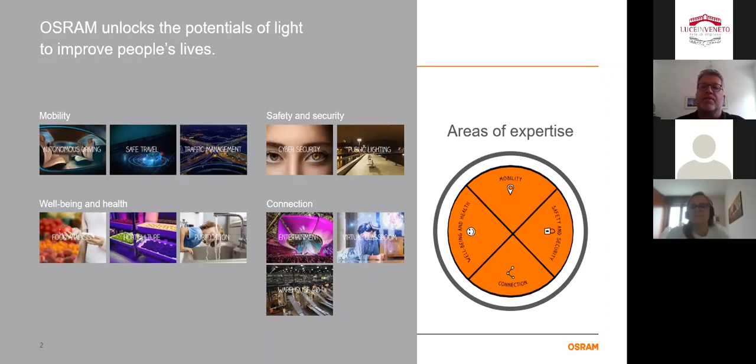This is a change in the setup of OSRAM compared to 10 years ago. OSRAM empowers autonomous driving, equips smart cities, and enlightens digital communications. So OSRAM in general enables people all over the world to see, to communicate, to travel, and to live better. That is our target. In total, OSRAM has more than 25,000 employees, is present in more than 120 countries, and last year had 4.1 billion euro revenue.

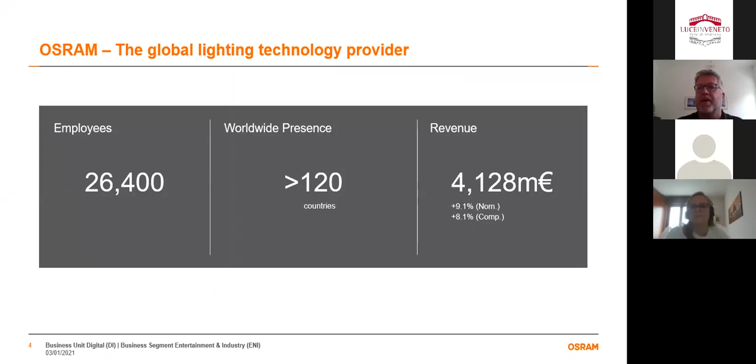The main business parts are automotive, OSRAM semiconductor with LED solutions and single LEDs, and what we call OSRAM Digital, which we are part of. This is mainly the business for complete solutions: horticulture, energy saving, environmental optimization, and asset tracking. We have smart street lighting, and what we call emotional lighting for buildings and so on.

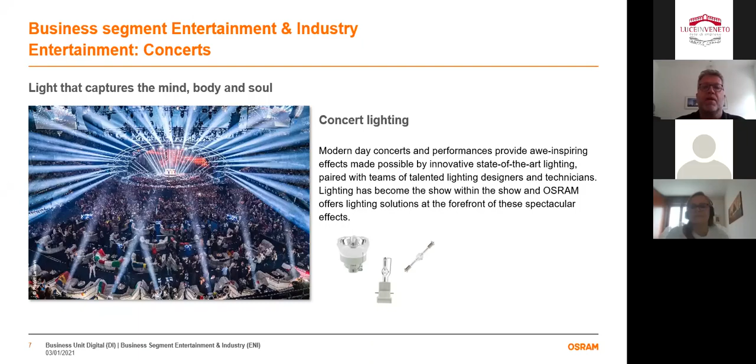On the connectable SSL component business, we have companies like Clay Paky, located in Italy, and ADB, especially for high-end entertainment applications. Then we have what we call ENI, entertainment and industry, traditional lamp components on a highly professional level, with certain discharge lamps, video projection lamps, cinema lamps, and so on. One part is the entertainment part with light sources and fixtures for concerts, what we call concert lighting, including complete LED solutions and complete fixtures with Clay Paky.

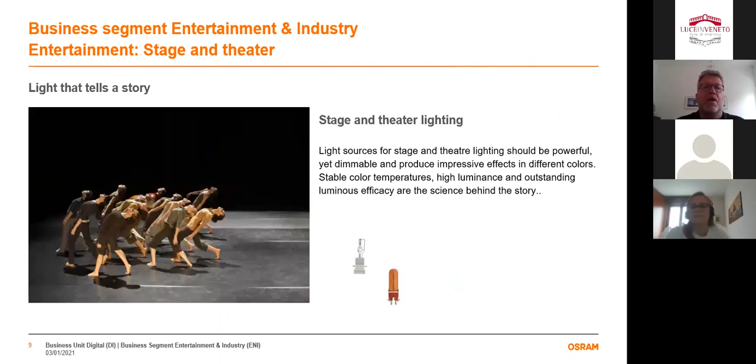We are also focused on studio TV and film applications. Whether shooting a film in a studio or in a TV studio, you still need light, whether traditional or complete LED solutions. We can provide this for stage and theater, all the way to cinema projection. Most cinemas still use traditional XBO lamps, even in digital projectors. The main light source is still an XBO, a discharge lamp, also produced by OSRAM within the entertainment industry group.

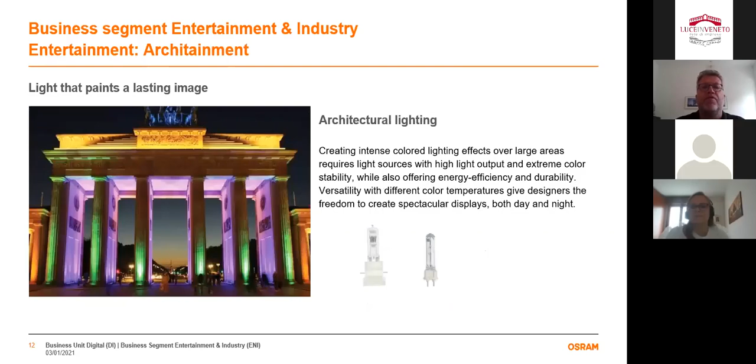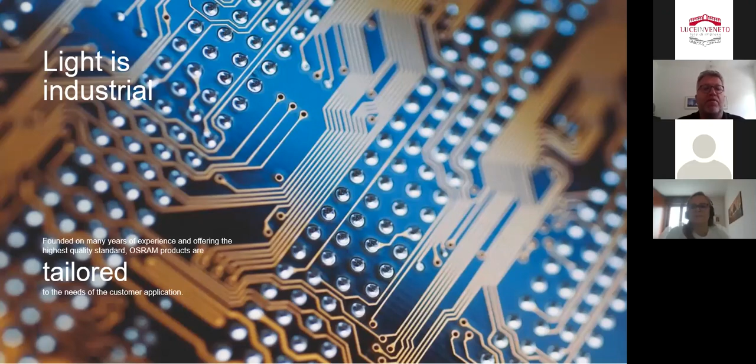For show and event lighting and architectural lighting, we have solutions, with Clay Paky, Traxon and e:cue as part of the companies with complete solutions or fixtures. Coming from entertainment to industrial, for many years we have offered the highest quality solutions tailored to the needs of certain customer applications. As an example, we have Fluence as part of our company, doing light for plant growing: more yield with less use of water, fertilizer and cultivation area.

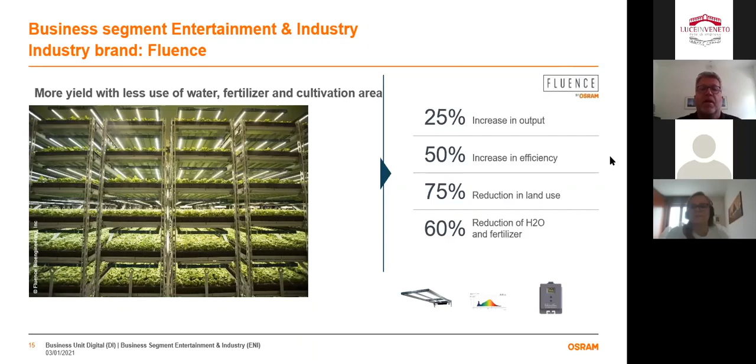This is, I think, the goal here. And therefore, with the light solutions from Fluence, we can increase: 25% increase in output, 50% increase in efficiency, 75% reduction in land use, and 60% reduction of water and fertilizer. This is also the result of our activities here in the industry range.

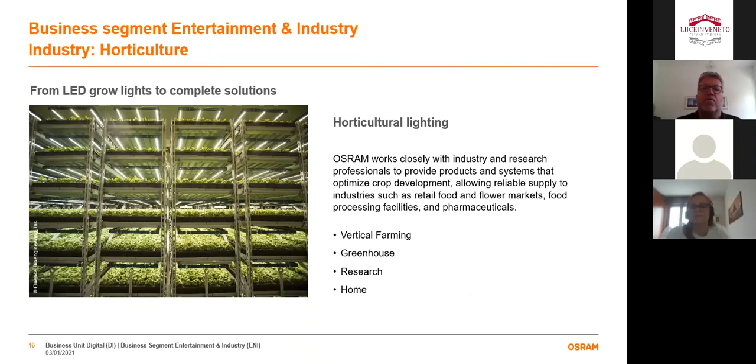As I said, based on LED solutions, we provide light solutions for horticultural, for vertical farming, greenhouse, research, and home. And of course, and this is the focus for today, is UVC purification. We are dealing with that more than 15 years with a complete portfolio within OSRAM. Main application was always purification of water, air, surfaces. That means for home, business, industrial application, water purification, air, surface.

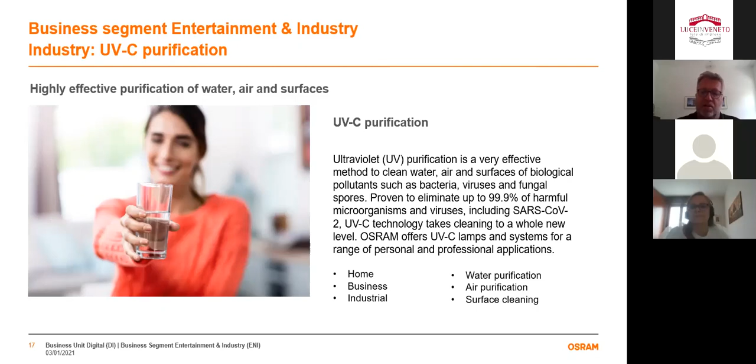And of course, especially due to the pandemic situation last year, the air and surface purification application field has grown or exploded. Therefore, a lot of new customers came into this game, new applications, new products. So that was a huge increase in workload last year, but also in revenue at the end.

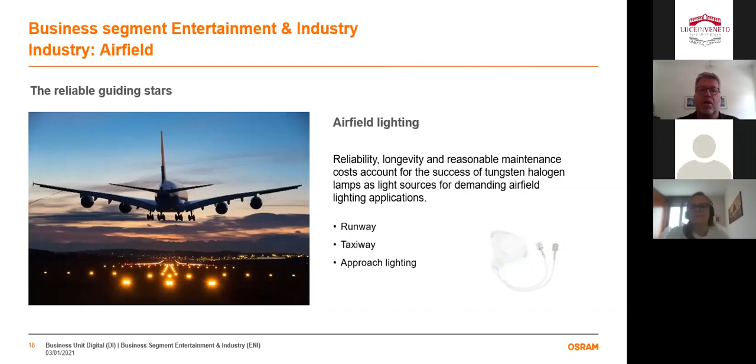And also we provide complete light sources for airfield lighting, for runway, for taxiway, for approach lighting. Everything based on halogen technology installed on airports is also coming from OSRAM. Then we have also special industrial applications with high intensity and maximum precision for the semiconductor industry. Here is an example for the production of microwafers. And here a mercury short arc lamp is used to project the very tiny structures of the ICs onto the wafer.

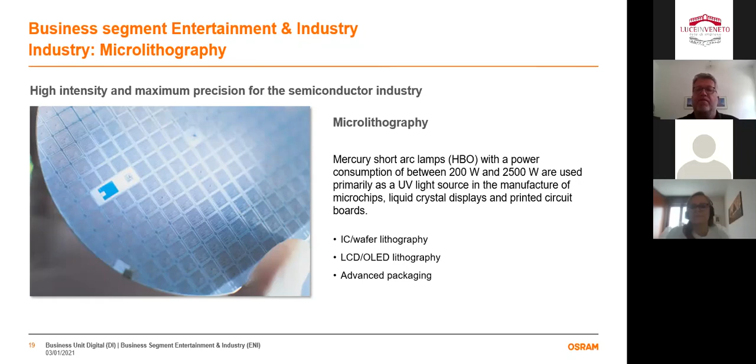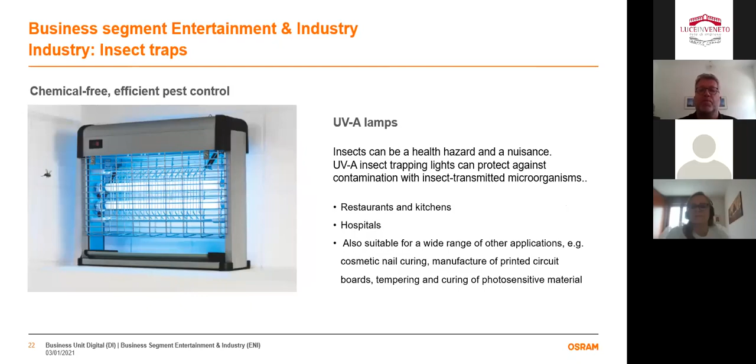And then we have also light sources for medical and scientific devices based on traditional light sources for surgical lighting, microscopy, medical, dental, and so on. Also projection, of course there's less demand because this is going into big screen TVs, but still there's projection out there with our P-VIP lamps for classroom, business, and home application. And we have also with our UVA lamp range a portfolio especially for insect traps in restaurants, hospitals, wherever it is required. So this was a short overview about the company and what we are doing.

So as I said, we are part of the entertainment industry within digital of OSRAM. And the focus in the last year, especially in my workload as a product manager for UV, was really UVC with all the requirements and questions which came up. So that's why I prepared a presentation for you today. I want to give you an update about the situation in the market, what kind of fixtures are in the market, what is required, what is the benefit between LED and the UVC lamp from OSRAM. And hopefully I can answer some potential questions, because at the end you can anyway ask something. I want to give you an update about the UVC market, technologies, products and application fields, UVC safety, products and solutions from OSRAM, and of course the AirZing Pro 5030, 5040, some applications or devices we provided already in the last year.

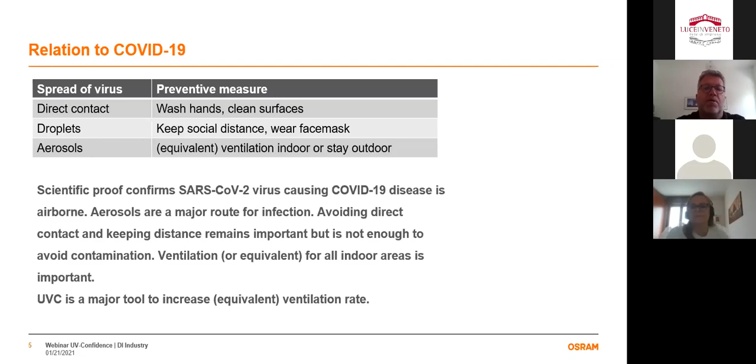That's why UVC, as a technology with this wavelength, is a major tool to increase, let's say, improve the ventilation rate.

But the problem with increased ventilation - and by ventilation we mean bringing fresh air inside, making an exchange between old and fresh air - is that it could be impractical and very costly.

Air quality itself is typically managed by increasing ventilation rates. We express this - and this is an established term in the last year and this year - as air changes per hour, shortly ACH. So how much air you should change per hour in a room to be safe. Each air change in total reduces the virus concentration in the air, and this was measured - a summary of all the measurements shows a reduction by 63%.

Ventilation rate requirements are already part of building guidelines. Increasing ACH reduces the transmission risk of airborne viral particles. I think this is also a result of all the experiences in the last year, from all the recalculations and tests that were made.

However, the infrastructural and operational costs associated with system upgrades are high when possible, and will cause discomfort, noise, draughts, etc. Recent studies showed that increasing fresh air supply to meet recommended indoor guidelines would more than double the energy costs when operated with conventional HVAC systems - heating, ventilation, air conditioning systems.

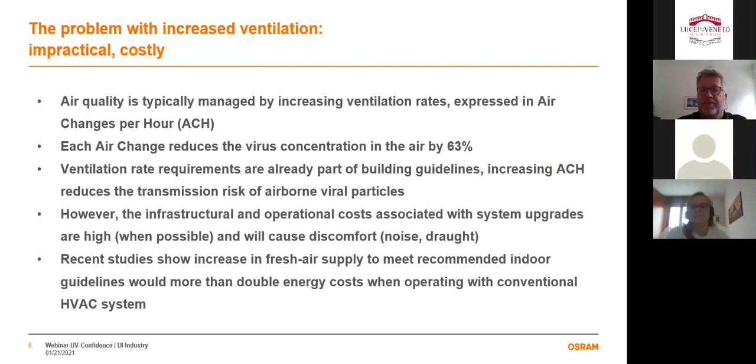That's why if you include UVC technology in the whole story of ventilation, you will save not only cost, you will also increase the purification rate and reduce the time necessary to get clean air in the room.

The opportunity from UVC is always increasing equivalent ventilation. It is well documented that UVC disinfection reduces exposure risks by inactivating virus and other pathogens. So we normally translate this into the UV dose, which is equivalent to air changes per hour, with no discomfort and low infrastructural costs.

For virus disinfection, an ACH of more than 10 is recommended by the WHO. Conventional ventilation systems cannot achieve this. UVC can.

This means the ability to increase occupancy and residence time, and reduce shared space downtime between users. We work towards simple requirements which incorporate space volume, existing ventilation, and localized UVC solutions.

This allows increased energy saving with compliance. Certain studies show UVC could reduce buildings' HVAC energy demand by up to 50% and allow for localized solutions.

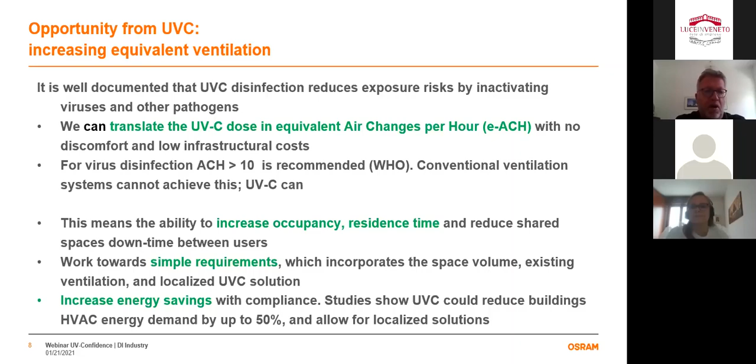This is something which was partly known before, but the problem with air purification in the years before Corona was always how to measure it, how to prove it, how to convince people about it. The good thing about this whole pandemic is that more and more tests were made, and we arrived at this kind of regulation, these standards for the ventilation of rooms.

As I said, UVC light can help a lot. Why can UVC light help, and what in general is UVC light? Most of you probably know that already.

Maybe for some it's only a repeat here, but still: it's a non-visible light and has higher energy than visible light. It's situated on the electromagnetic spectrum between visible light and X-rays. We classify it into three wavelength ranges, each having different applications.

315 to 400 nanometer, we normally talk about UVA, and this is what I mentioned, especially used for insect traps, for detection of forgeries, drying inks and paints, it's still used here. Also the transition to UVA LEDs is much higher than UVC. I'll come to this later, but they are still also conventional in the market.

But this is general, the wavelengths we're talking about. Then we have wavelengths between 280 and 315, mainly for sun tanning and medical therapy. And then we have 100 to 280 nanometer, which in total is the wavelength range for UVC. This is mainly for disinfection. Let's say the really germicidal range is between 250 and 280 nanometer.

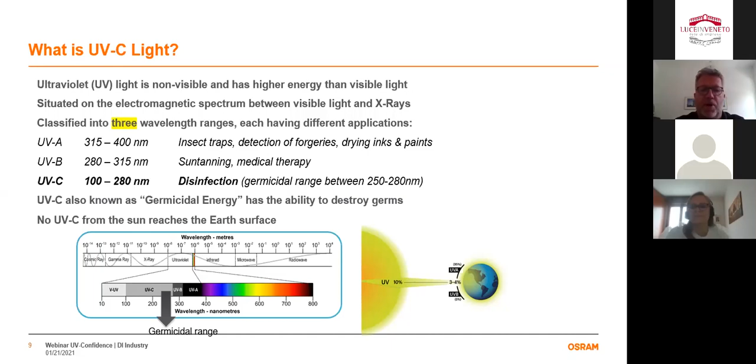That's why it's so effective regarding bacteria and viruses - this radiation does not exist in our atmosphere, compared to some percentages of UVA and UVB. Viruses and bacteria normally are not used to getting UVC light, and this is, let's say, the advantage we have here with UVC.

How it works: in general, the DNA and the RNA contain the genetic information specific to the species, information that is transmitted during the reproduction of these cells. The photochemical reaction created by the absorption of UVC leads to the creation of distortions in the DNA and RNA, making the replication of the microorganisms ineffective or impossible. This results in cell death or the appearance of mutants that are non-viable or unable to reproduce and can't cause disease or spoilage. So this is the advantage we have with this whole UVC technology and the special wavelengths.

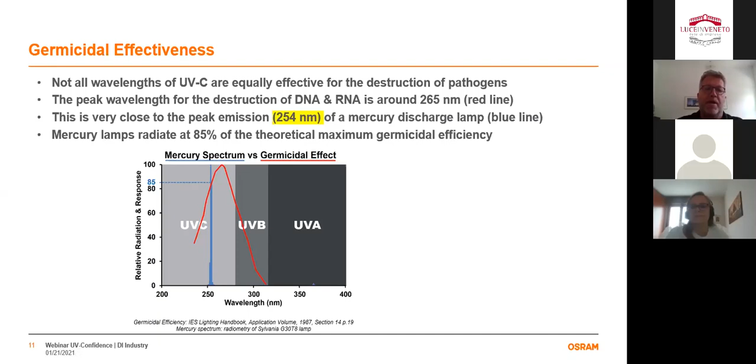UVC allows consistent performance. How you need to destroy a certain pathogen in the air, on the surface, in a certain time - we call it the dose, that is the energy which is required to make that happen. The dose is quantifiable, allowing for reliable and consistent disinfection.

There are two important factors which determine what's required for the inactivation. One is the intensity of the radiation - how much energy on a certain surface I have, what is the power of the lamp, the UVC power, etc. And what is the duration of the exposure - how long am I able to expose this certain surface?

And we have, let's say, this well-known formula - maybe not always well-known, but well-known in the meantime. We can calculate this for air, for water, and for surface disinfection. The dose accumulates; it does not need to be continuous. Air treatment should always consider recirculation.

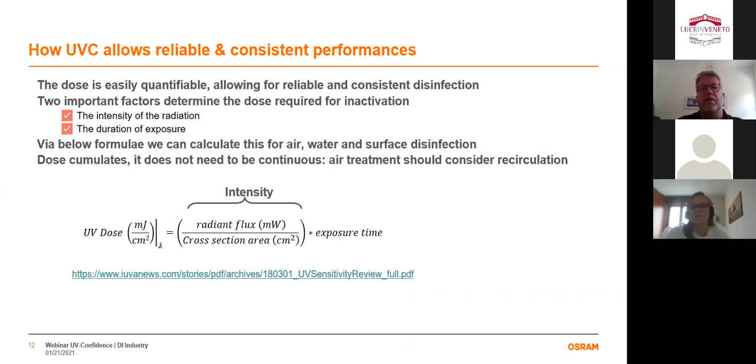This will help here, and OSRAM also has on the website calculation tools for certain wattages, whether it's AirZing 5030, 5040, or certain UVC lamp types. Here you can calculate what is my distance, what is the dose required to destroy a certain bacteria or virus, and then you can easily calculate the exposure time required.

We know there are certain UVC energy sources in the market. Let's start with mercury lamps, where the focus is here, and also in our portfolio - low power mercury lamps in different shapes, single or double-ended, from 4 watt to 95 watt.

The pro of these light sources, and why we were so successful last year, and why we expect growth in this mercury lamp market for UVC in the next years, is because we have the highest energy efficiency and the highest UVC power necessary for certain applications. The lamps are long life and reliable - we're talking 8,000, 9,000, 10,000 hours lifetime. It's proven technology, with supply already existing for ECGs, CCGs to operate the lamps, and it's quite easy to apply in systems.

And of course the con is there's a tiny mercury dose inside - we're talking about 2 milligrams, 4 milligrams, but still it's mercury inside. It's not banned due to the special application regulation within the EU. These lamps will exist for the next years, but still it's mercury inside.

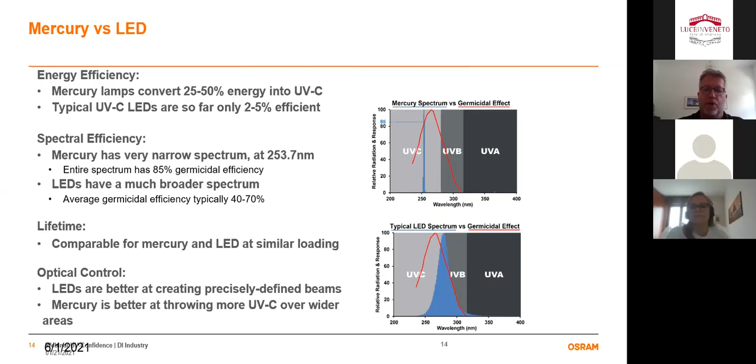And of course, I don't have to repeat this. It's really proved, and also researchers from, for instance, the Boston universities found out that UV light has the ability to eliminate the coronavirus. I think this is the basis for all the further slides and further discussion. This is also clear. And UVC light also eliminates at least 2 other coronaviruses that are near relatives of the COVID-19 virus, SARS-CoV-1 and the MERS-CoV virus as well. So this was basic information about the technology, pros and cons.

Now let's go into the fixtures. What are the different types of fixtures in the market? Of course, you know it already, but it's always good to see what the benefit is, or what kind of application can be used. First of all, we're talking about contained UVC light systems, completely closed light systems. That means the disinfection itself occurs within a closed, contained space, using a hidden lamp fixture. I mean, this is clear.

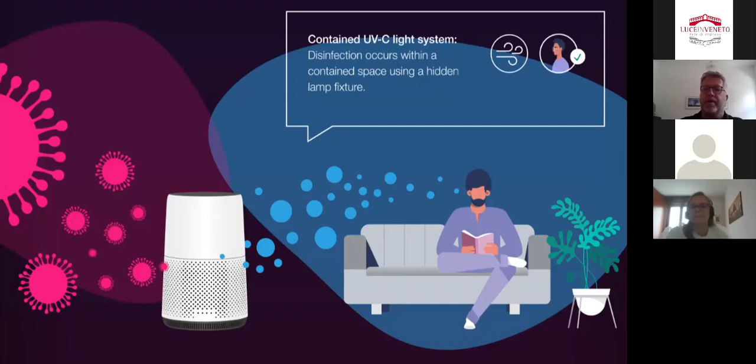We know about the safety risk of open UVC light, but if you put it into a closed system where almost no UVC light is coming out, and the UVC light is only used for the air which is coming into the fixture, then it's very efficient. That means air is drawn into the luminaire using a fan. The air will be disinfected by the UVC lamp, then expelled. It's totally safe due to completely contained UVC lamps. Even unskilled users can easily install it.

And I can also tell you, for the safety standards and regulations, there are clear limits on how much UVC light is allowed to come out of these kinds of closed fixtures, and it's almost zero. I remember last year there were a lot of UVC fixtures, especially from Asian countries, on Amazon and all the online platforms, with horrible safety standards. This is no longer allowed, and therefore, when you want to get the CE certificate for new fixtures, you have to ensure that you always use the latest UVC standards.

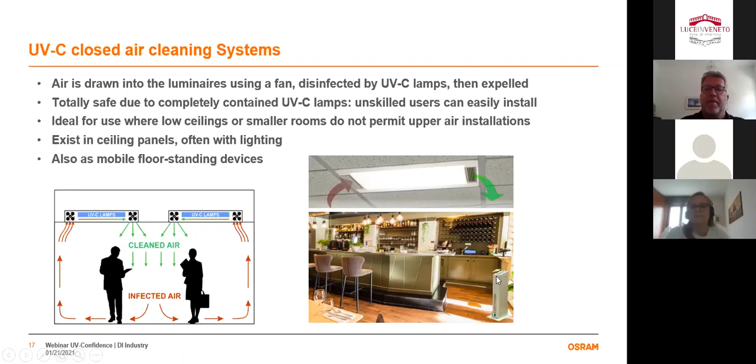And of course, these closed air cleaning systems are ideal for use where low ceilings or smaller rooms do not permit upper air installations. They exist mainly in ceiling panels, often with lighting, and of course mobile floor standing devices are also in the market and can be used as an air cleaner. I do not have to repeat: room air is sucked in and clean air is coming out.

Also a point here: there are pure filter systems in the market, there are UVC systems in the market, sometimes both. The UVC light totally neutralizes viruses and bacteria, so it's reliable. The UVC device is almost maintenance free, as I said, up to 9,000 hours lifetime, energy efficient, eco-friendly. Filter systems are effective against viruses with filter level H13 to H14. Of course, they always require frequent maintenance. They can collect infectious germs. That could be a disadvantage.

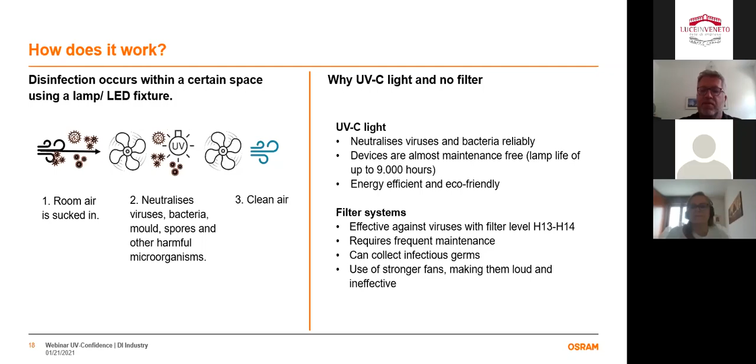And in order to clean the same air volume as pure UVC light, you always have to use a stronger fan, and in certain fixtures this makes it louder and also less effective. So if you really need a UVC cleaning device with low noise, the UVC-based cleaning systems are always preferable in this case. And in principle, our AirZing 5040, 5030 belongs to this group.

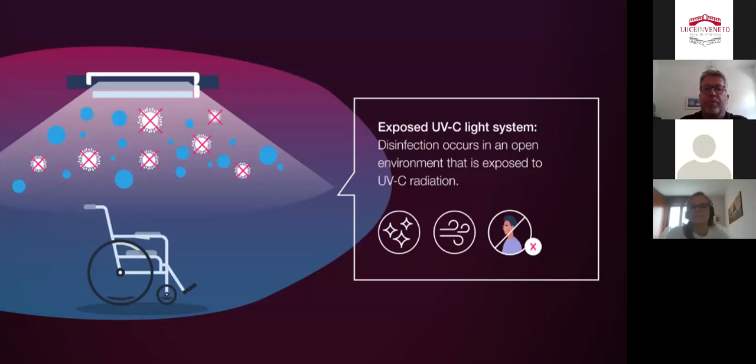Then there are the exposed UVC light systems. That means open face, which is used for the convectional air in the room, but also for surfaces, but always without people in the room. Mainly they are ceiling mounted. They have direct irradiation to the air and surface. They are also used in sealed cabinets for disinfecting objects, like in this example for face masks and hairdresser tools.

And as I said, not suitable for operation in the presence of people, animals, or indoor plants. It must be used with multiple safety systems to prevent accidental UVC exposure. For instance, our safety sensors applied to the 5040, 5030 UVC AirZing Pro, which automatically shut off the UVC light when somebody is moving, when somebody's in the room.

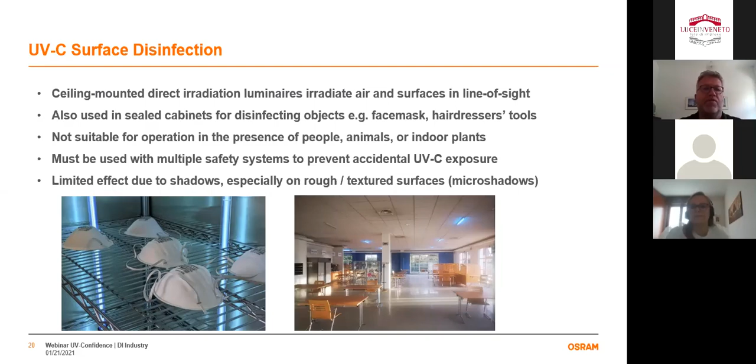It has always a limited effect due to shadows, especially on rough texture surfaces or micro shadows. I know there are certain robots now in the market, which are moving, especially with main applications in hospitals, to go in areas where normally you have a shadow from the upper air. That could be also an application field for open face fixtures. Yeah.

Luminaires are mainly on the walls or ceiling, and they shine a narrow beam of UVC above head height, because of course it must be ensured that no UVC light is coming down to people walking there. And this uses, let's say, the natural convection currents of the air, and due to the circulation of the air in these bigger rooms, there is a constant air purification.

We saw that in Germany. Here we have several supermarkets already installed with this kind of device. I know it's at the moment also very popular in the US to use in these big rooms this kind of upper air device, which, let's say, reflects the UVC indirectly in the direction of the ceiling. That means the infected air is continually sanitized each time it passes through the UVC rays.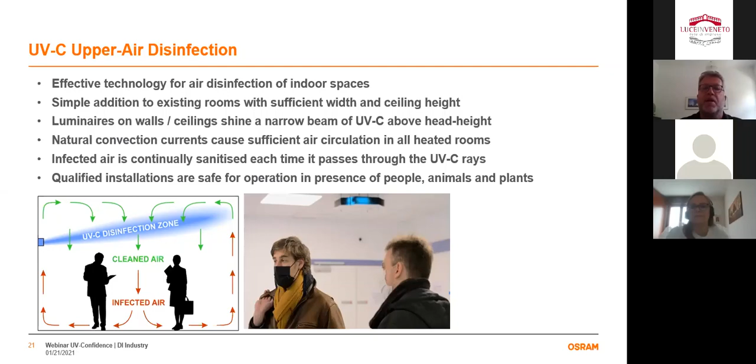And qualified installations are, of course, necessary. But at the end, it's safe for operation with people, animals and plants inside. And then, of course, another method is to use UVC technology, UVC light sources, lamps in existing heating, ventilation, air conditioning systems.

We have a lot of examples, discussions and calculations we made with customers in supermarkets. How can we equip and how many lamps do we have to equip in our existing HVAC system, in our existing air conditioning system? This is also very popular. We also have discussions with OEMs who completely manufacture and install this, and they want to equip their system with UVC, as you can see here, in a modular way.

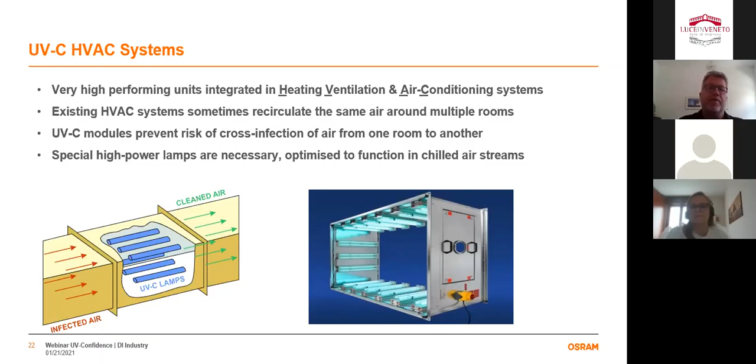And there's always the question, how much air will be cleaned in a certain period? What is the room size for the required rooms? How much dose do I need? How many lamps do I need for my module? Special high power lamps are necessary to optimize the function in chilled airstreams. Multiple lamps are mainly required, based on the room and the airspeed. So this was an overview of all the application fields.

Here you see, especially because the focus is on the AirZing 5030, 5040, certain application fields for open face devices. But of course, these also require closed fixtures, upper air fixtures, and so on. The focus at the moment is on open offices, doctor practices, subway stations, public transport, hospitals, hospitality, schools, and entertainment. I don't know in detail the situation in Italy at the moment, but of course there is also in the next days and in the next week

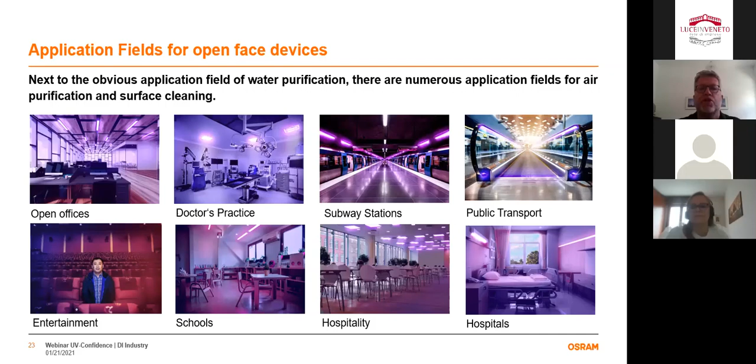So okay, the recording stopped. Okay, I hope you can still hear me.

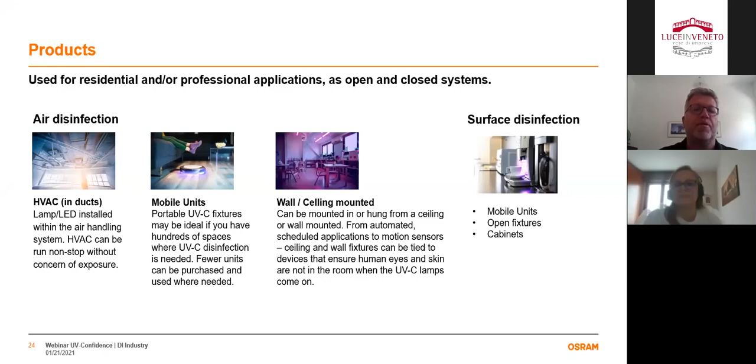So we still have a lot of possibilities in terms of fixtures, installations, and different application fields for UVC technology. In conclusion, UVC is well known and well understood, has a long history, track record, and effective disinfection. The scientific basics of UVC germicidal efficiency are well understood. UVC helps to address the pandemic. There is proof of the effectiveness of UVC against SARS-CoV-2.

UVC helps mitigate the impact of the current pandemic in several ways. UVC reduces the transmission risk of all airborne transmitted diseases. UVC systems can inhibit the airborne transmission route of SARS-CoV-2. UVC is a cost-effective technology complementary to mechanical ventilation. Surface UVC disinfection systems are an effective method to help reduce infection rates.

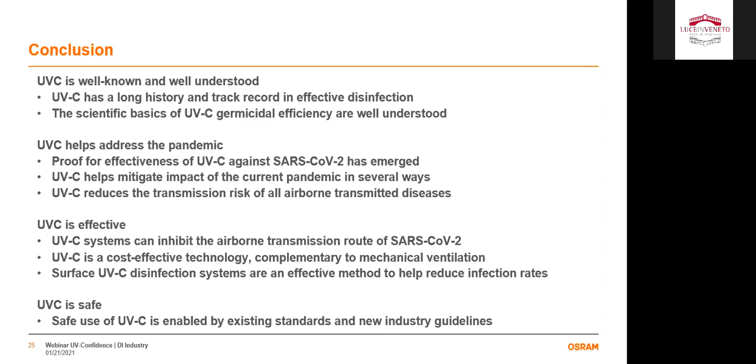And UVC is safe. Use of UVC is enabled by existing standards and new industry guidelines. So I think this is important to know. There is a risk, and I mentioned there's a risk for the skin, even if it disappears. And if you don't have long-term contact with UVC, it does not produce cancer automatically. But of course, especially for the eyes, UVC light can damage the surface tissue.

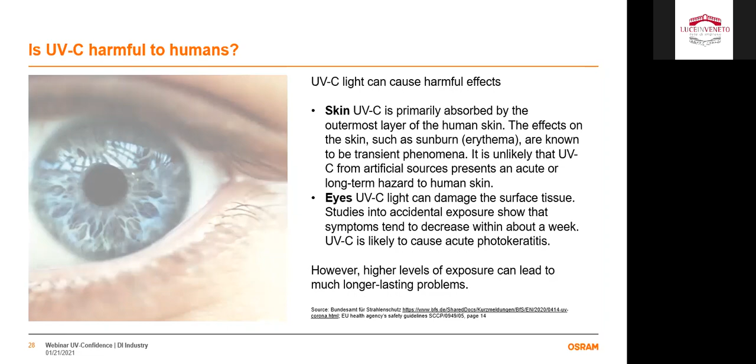The studies into accidental exposure show that symptoms tend to decrease within about a week. That's why, I mean, it's clear it can, let's say, lead to much longer lasting problems. Therefore, a safe use of UVC is required.

And also the question is not only the impact on people, on human skin or eyes, and plants, but also the effect on certain materials for exposure and so on. Here we also do tests, and maybe in a later stage we can provide the results. UVC can cause paints and other materials to fade and degrade over time. Sensitive materials like plants should be removed from the areas of disinfection if we're talking about direct exposure.

OSRAM research has addressed the effects of UVC on different material samples like leather, fabrics and textiles, plastic, rubber, and PVC. And here only an example of a certain surface color after 1,131 hours. The surface color has no significant change even after that, but it's always important, and more external labs are also making these long-term tests about the effect of UVC on certain materials. Because it's also important if you installed a kind of indirect or direct UVC fixture into a certain room.

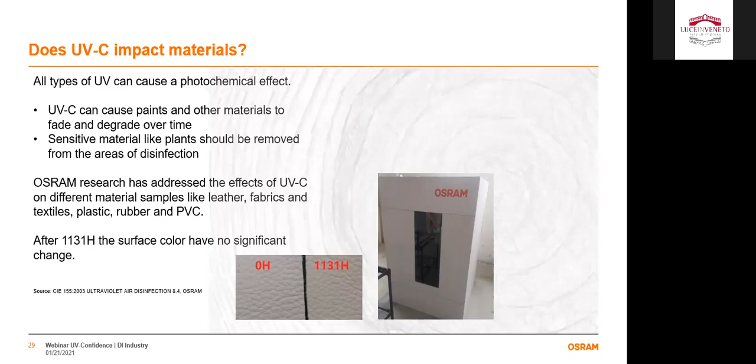Also, the question is always, can UVC be reflected from ceiling and walls? Because not all white paints on the wall and ceiling reflect UVC radiation in the same way. Some of them have a reflectance of 8%, whilst others with metallic components can reach 47%. By way of comparison, white paint normally reflects between 70 and 90% of the light.

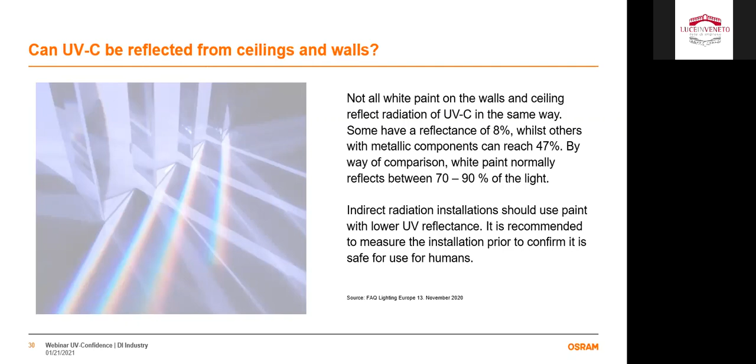Indirect radiation installations should use paint with lower UVC reflectance, though it's recommended to measure the installation prior to confirm it is safe for use for humans. So especially if we're talking about upper air installation, the reflectance of the paint or the material of the ceilings is important to know and to measure here as well.

And of course, there are certain safety standards and regulations applying for UVC products at the moment. Here you see an overview, and also the Lighting Association, which OSRAM is a part of, is always improving and refining the safety regulations here. So there are already safety regulations like EN 55015 in place. And that's why if we make something, whether it's a module or a lamp, we also use these kinds of regulations here.

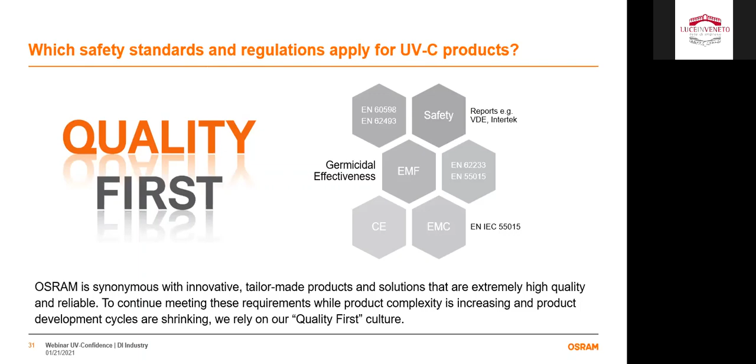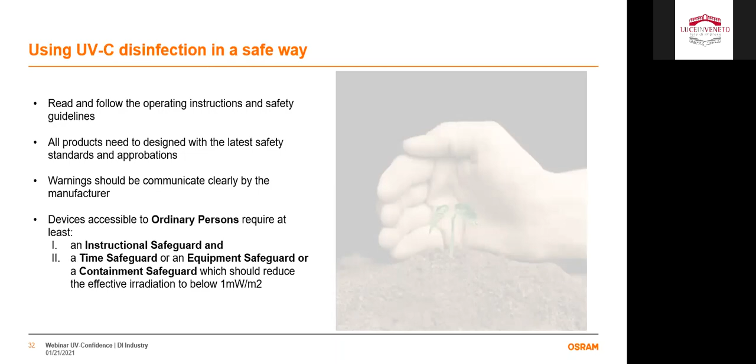That means if you're using a fixture, module or lamp from OSRAM, always read and follow the operating instructions and safety guidelines. All products need to be designed with the latest safety standards and approvals. The warning should be communicated clearly by the manufacturer. Devices accessible to ordinary persons require at least an instructional safeguard, and second, a time safeguard, an equipment safeguard or a containment safeguard, which should reduce effective irradiation to below 1 milliwatt per square meter.

Coming to the products from OSRAM, I know some of you have questions, maybe you can wait until the end. OSRAM is bringing different UVC solutions into the market. The clear focus is really on the component, on the lamp source here. We started last year already with the AirZing Pro 5030, 5040, which is a lamp fitted on a surface with the bases installed, additionally with a safety sensor which shuts off the lamp when somebody's moving or entering the room.

But also we launched small home solutions like the AirZing UV Compact Pro for smaller rooms, or you can put it into the cup holder of your car. It leads to a continuous air purification in cars and smaller rooms. As I said, we have certain business solutions with the AirZing Pro 5030, 5040. And we have our lamp portfolio, which I will show you a little bit in detail with our HNS lamp range.

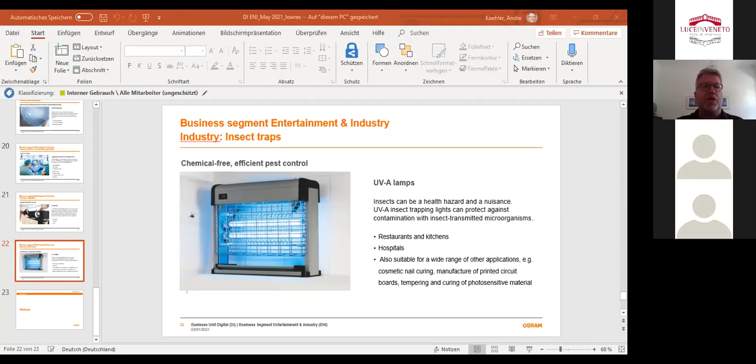Sorry, Andre, for interrupting, but we are not seeing the presentation you are talking about. We just see the general presentation about DI at the moment. Okay, what should I do? I don't know. So you still see this here? Yeah, we are stopped at the thank you last page of the DI presentation. The whole time? While you were speaking about the HNS lamps, yes. How about the other presentation about UVC light and applications? No, that was okay. Sorry for that, because I'm not really familiar with Zoom. We're always using Teams here. So if I switch now to another presentation, you still see this? We are seeing the UVA right now and the thank you afterwards. Okay.

So if somebody could give me advice how to... new share, maybe just a second, maybe I switch to... and now? Now it's the PURITEC HNS long lifetime with the mercury and the kind of lamps. Okay, I'm sorry again for that. I don't know if I have to give a new release of my screen if I change here. At the moment it's good. Always interrupt me, Anna, if something does not match.

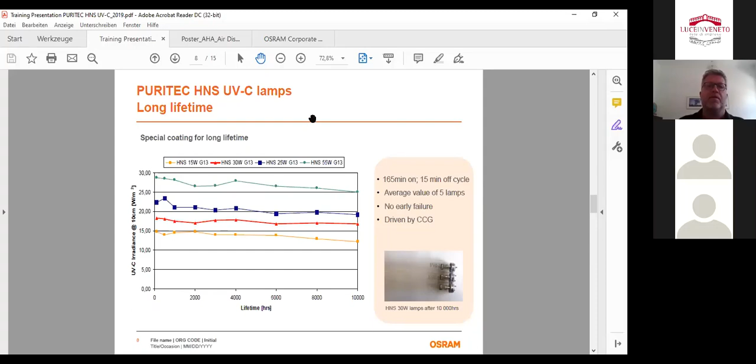Okay, so this is again the performance of our PURITEC UVC lamps. It's always our target to have a reliable performance, low mercury content inside, and we have different form factors known from general lighting fluorescent lamps. So we have UVC lamps in the compact S design, single-ended, the compact L design, also single-ended, the linear T5 lamps, and the linear T8 lamps.

And of course, we are also providing or recommending ballasts from our DS colleagues within OSRAM, single and twin lamp ballasts for a wide range of different lamps with high performance and lifetime, easy, quick and economic upgrade to energy efficient ECG operation, VDE accredited and so on. So we can also provide the ECG if it's required.

So this is an already established portfolio. We improved the portfolio in the last year, but still this is our main portfolio, starting from 4 watt to 95 watt for air, water and surface purification.

So if I come back to the presentation, help me if you can see it. Okay, do you see now again this overview, bringing UVC confidence, Hannah? We are seeing it. It's the overview of the application. Okay, so always if I change the presentation, I have to re-release my screen. I know it's a little bit similar to Teams.

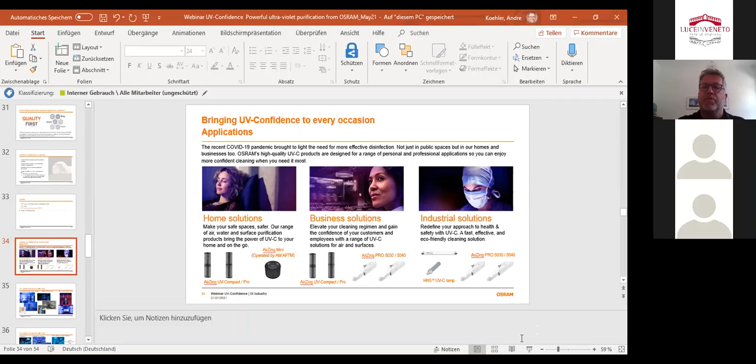Okay, good. This is our portfolio of existing UVC solutions, whether it's on the small side, these kind of tiny fixtures, and on the other side the UVC lamps, but also our AirZing Pro 5030 and 5040. We have certain case studies already for our AirZing Pro 5040 and 5030. Especially we have examples where installations were in hospitals in Portugal, and we were the first during the peak last year in China, in Wuhan, with our products. We have examples of installation of the AirZing 5040 and 5030 in Harbin in China.

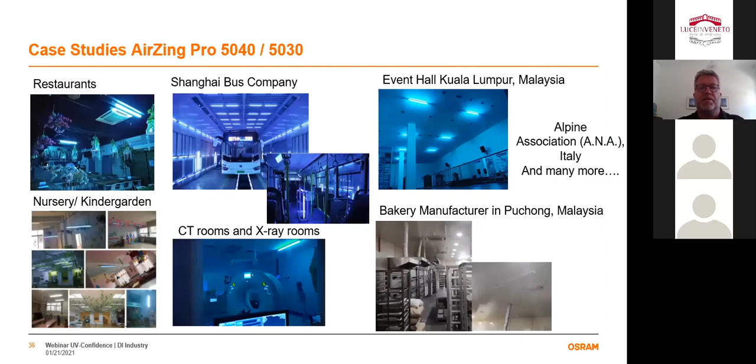Also equipped in restaurants, kindergartens, a Shanghai bus company, CT rooms, X-ray rooms. Here an example for an event hall in Kuala Lumpur, a bakery manufacturer in Malaysia. A lot of applications, but besides this, second, also

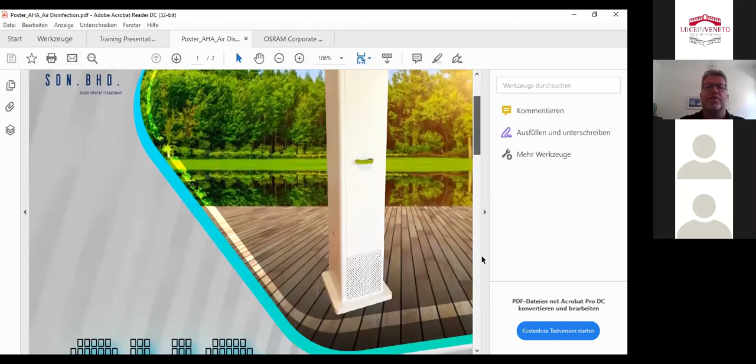Where is it here? An example where manufacturers use our AirZing, 3 of our... but this can also show you that's a 5040, 3 pieces into enclosed fixtures. It's easy to install. We have the ECGs inside here, and it's easy to install.

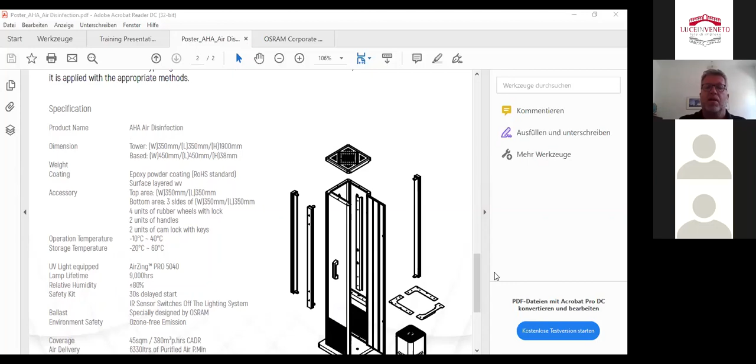That means it's on the one hand a 5030, a 5040. It's, let's say, a complete standalone product with the disadvantages, of course, of an open face fixture, but it can also be used as a module for integration in fixtures. Yeah? So that means coming again to the AirZing Pro 5030 and 5040.

We have 2 versions. For the technical details, we're using 30 watts for the 5030 and 36 watts for the 5040. So the main difference is the UV power for the 5040 is a bit higher than for the 5030. But of course, there are some other questions how to use this fixture as a standalone fixture in certain rooms for air and surface disinfection.

And therefore a lot of questions came up here: how large should the room be using the AirZing fixture? How many should I use in a certain room space? So based on testing, one AirZing fixture can deactivate 99% of the microorganisms in a room that is approximately 30 cubic meters in 30 minutes, and a room of 60 cubic meters in 60 minutes.

Of course, using multiple fixtures can allow for shorter exposure time: with 2 fixtures and a 60 cubic meter room, exposure time can be 30 minutes, from 60 minutes to 30 minutes. And of course, as with visible light, the further the light travels from the source, the less light energy it will have.

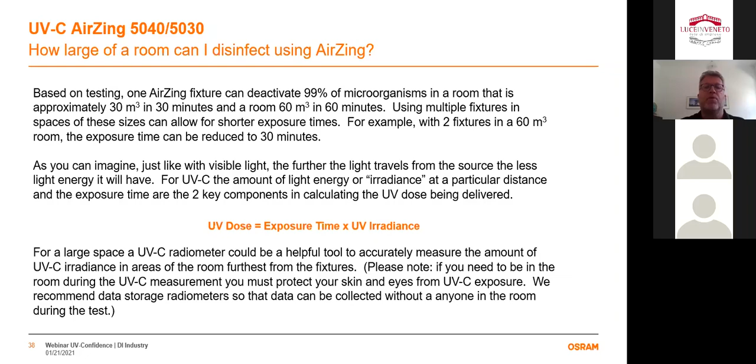Here are some examples of calculating the disinfection in the room, the exposure time in the room. And this can also be accurately made in our calculator, which is available on the website of OSRAM. Here you can also use the distance from your device to the surface, and you can select the power of the lamp, and then it gives you the result of, for instance, the exposure time. Yeah.

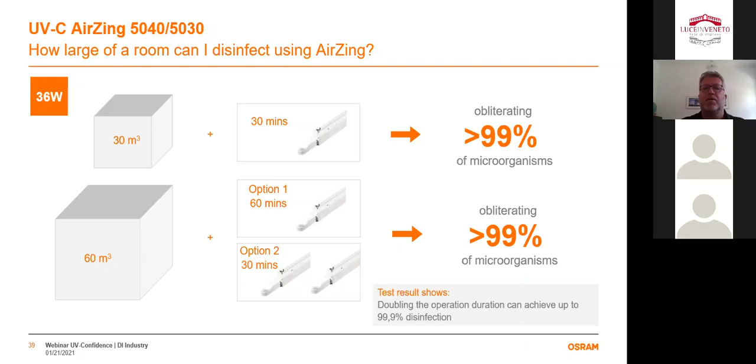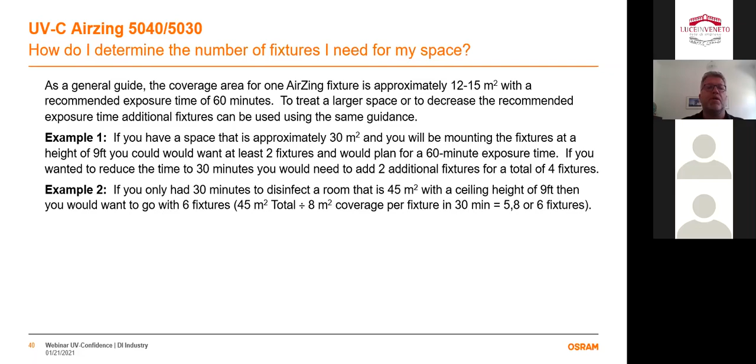Of course, this is always the question: how do I determine the number of fixtures I need for my space? As I said, general coverage of the AirZing fixture is approximately 12 to 15 square meters, with a recommended exposure time of 60 minutes. To treat a larger space or to decrease the recommended exposure time, additional fixtures can be used using the same guidance. And the examples I already mentioned here, 30 square meters and so on.

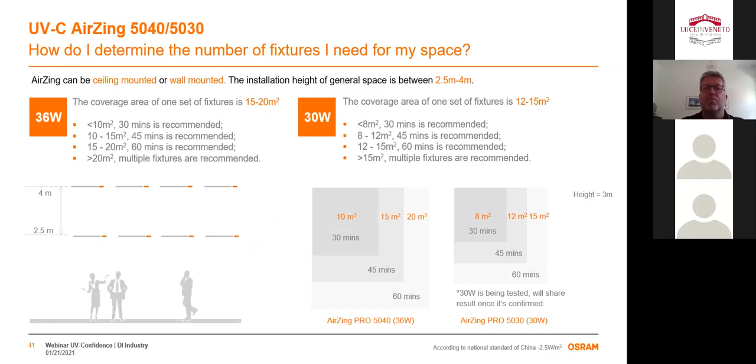Here again, more in a visual way, the AirZing can be ceiling mounted or wall mounted. The installation height of a general space is between 2.5 meters to 4 meters. And as I said, the coverage area is shown here already. This gives you an overview of the exposure time required, depending on the square meters in the room you want to expose. Yeah.

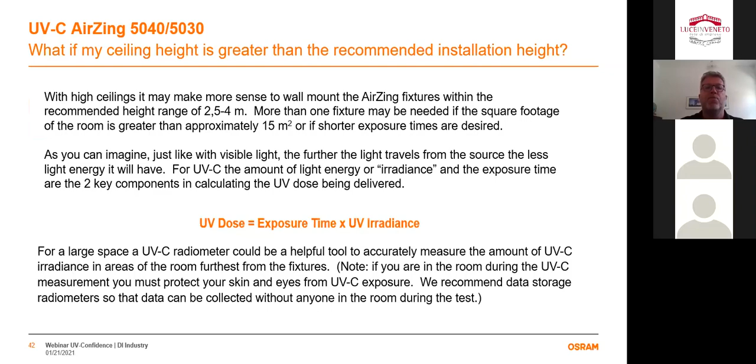What if my ceiling height is greater than the recommended installation height? Here, with the ceiling height, it may make more sense to wall mount the fixtures between 2.5 and 4 meters. And for a larger space, it's always better to also use a tool, a radiometer, to measure the UVC light which is coming out of the fixture.

And how long should I operate the AirZing to disinfect a surface in my application space?

UVC is most effective on surfaces directly exposed to the UVC light. It's important to note that soiled surfaces, porous materials, or recessed areas may not be disinfected. When determining the location for the AirZing fixture in the room, it may be helpful to consider the surfaces that are higher priority, such as high contact areas, to ensure the fixture location allows for direct exposure to the UVC light. The amount of exposure time needed to disinfect is based on the UV dose required for the targeted microorganism.

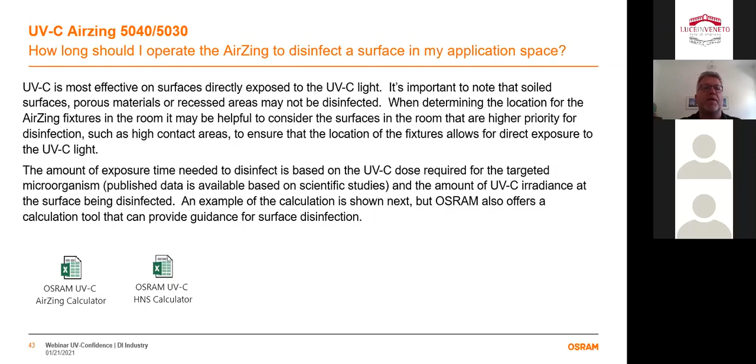There are tables available on certain online platforms giving an overview of certain microorganisms, yeast, viruses, bacteria, and the required dose to kill them. Based on that, and the fixture you're using for surface purification, the installation height, meaning the distance between the surface and the UVC light source, you can calculate the exposure time required to kill a certain virus or bacteria.

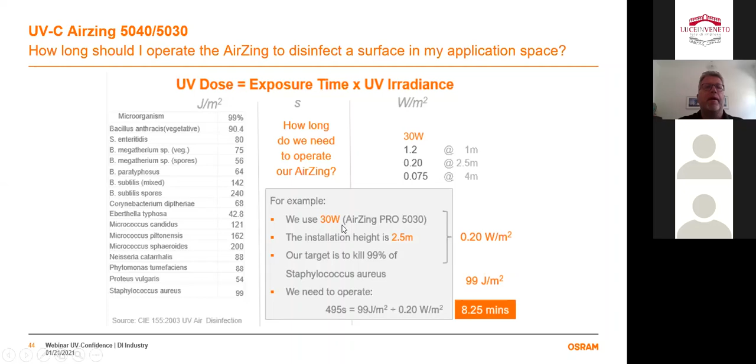Of course, there's always the question: how can I measure the UVC output of my open face fixture like the AirZing, so that I know it's properly working? There are both quantitative and qualitative methods.

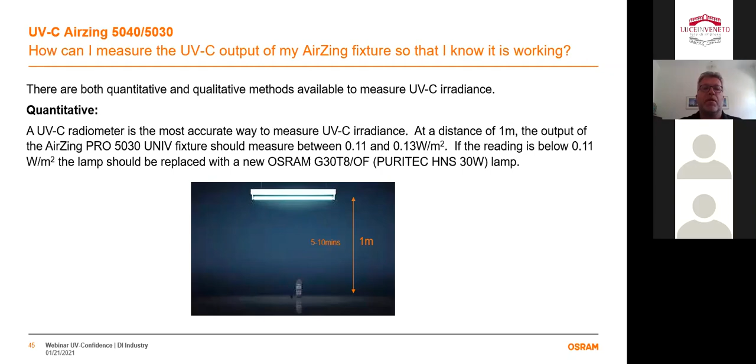Quantitative, of course, a UVC radiometer is the most accurate way to measure that. At a distance of 1 meter, the output of the AirZing 5030 should measure between 0.11 to 0.13 watt per square meter. If the reading is below that, the lamp should be replaced with a new one.

UVC radiometers are available in the market with a range of features and prices. Data storing models are always optimal, as they can be operated in the room without a person needing to be present to view the result live. Stored results can be reviewed after the chosen exposure time is completed. For models that do not store data, the person operating the radiometer must wear full protective clothing and UVC blocking eyewear to protect eyes and skin from exposure during testing.

There are also qualitative methods, such as testing cards, strips or dots available at lower cost that can be used as a qualitative measure of UVC light exposure. These cards can be placed within the space between the light source and the surface. The test strip has an area sensitive to UV that will change color as an indicator of UVC exposure.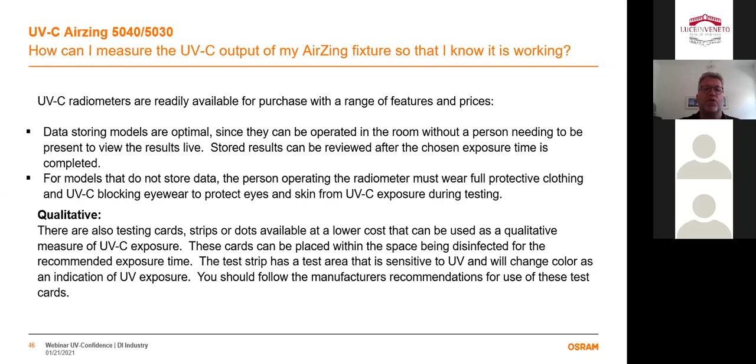As I mentioned, UVC AirZing 5040 and 5030 are equipped with a safety sensor and a responsive IR motion sensor. When the fixture is turned on, the sensor provides a 30-second delay before energizing the lamp, allowing the person operating or installing it to exit the room. After this warm-up time, if the sensor detects motion, it immediately turns off the fixture, and it will not power back on unless the fixture is shut off and then turned back on.

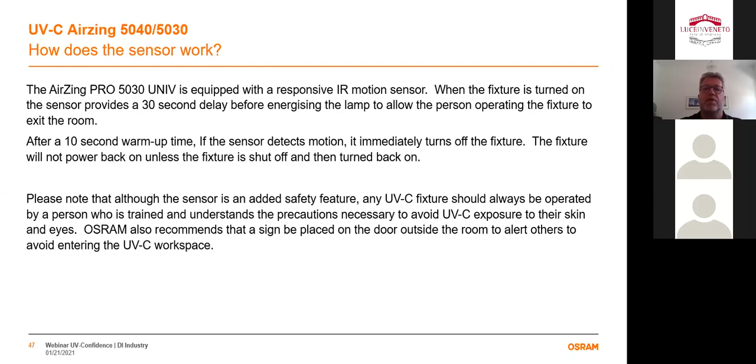This is for professional use, and any UVC fixture like this should always be operated by a person who is trained and understands the precautions necessary to avoid UVC exposure to the skin and eyes. If you use the open face 5040, 5030 in the normal way, OSRAM always recommends a sign on the door outside the room to alert others to avoid entering the UVC workspace.

As I said, OSRAM lamps with this kind of technology, low power with a peak emission of 254 nanometers, don't produce ozone, which is also harmful for human lungs and respiratory function. Ozone is only created when UVC radiation has a peak of 185 nanometers within the complete UVC range. This is blocked by the glass, so our peak is only at 254 nanometers, and this wavelength does not produce ozone. We also have, in preparation for all our lamps and fixtures, an ozone test.

I think it's already done and available for the AirZing 5030, 5040. It also shows the customer that it's really an ozone-free light source and ozone-free device.

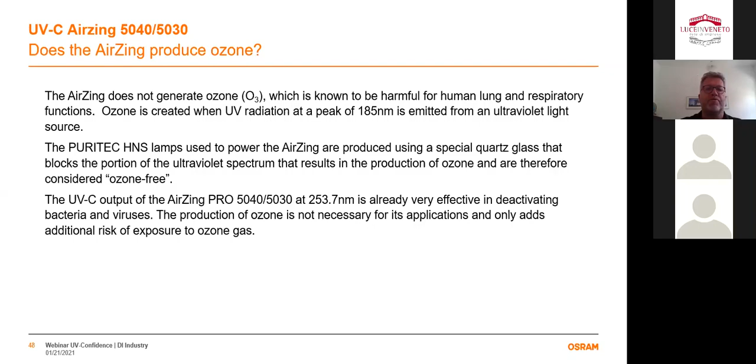Okay, question: what electrical setup options are available and what do you recommend?

The AirZing itself should always be installed by licensed electricians. It's also important to know that the UVC fixture should always be operated on its own circuit with an identifiable switch separated from the standard light switch, and should be properly labeled. Safety measures such as interlocking devices, lockouts, or safety switches are also highly recommended.

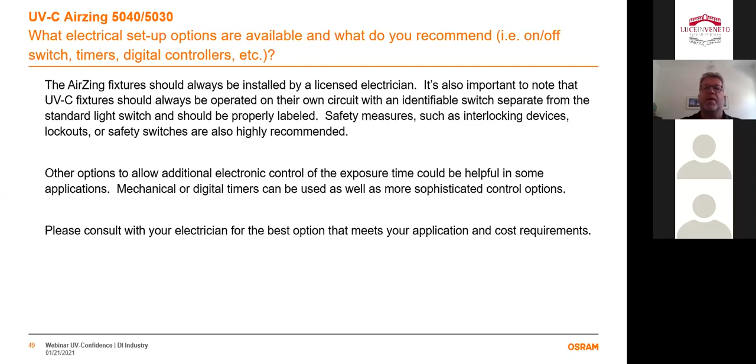Other options to allow additional electronic control of the exposure time could be helpful in some applications. Mechanical or digital timers can be used, as well as more sophisticated control options. But for this, you always have to talk to your electricians if you want to install this as an independent open face fixture in your application.

Also, what should I do if the lamp breaks? Like all the standard fluorescent lamps, compact fluorescent lamps, the UVC germicidal lamps contain mercury. If the lamp should break under any circumstances, the same procedure applies and can be found online.

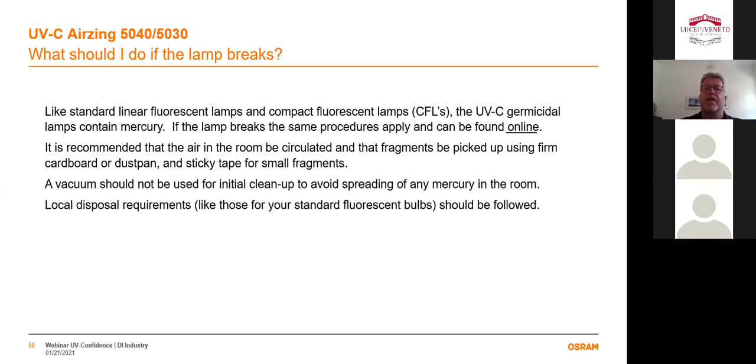It is definitely recommended that the air in the room be circulated and the fragments be picked up using firm cardboards or a dustpan and sticky tape for all these small fragments. A vacuum should not be used for initial cleanup to avoid spreading any mercury in the room. And as I said, the local disposal requirements, like for the standard general line fluorescent lamps or bulbs, should be followed.

It won't accidentally fall out of the fixture. It's recommended for fixtures to be mounted away from where activity is taking place that could result in the fixture being hit by an object, like ball playing, etc. I think it's obvious.

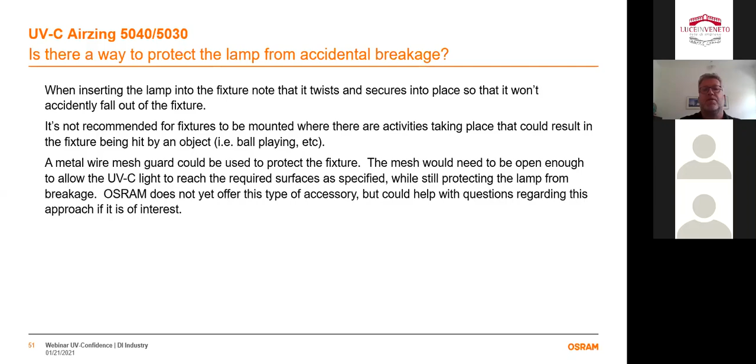There's also, if required, for each device, whether it's 5040 or 5030, an official test and effectiveness report from the independent lab available here, which shows the minimum operation time for a 99.9% germ reduction based on certain bacteria and viruses, including SARS-CoV-2. This is written in the report, and this report is available online or on request.

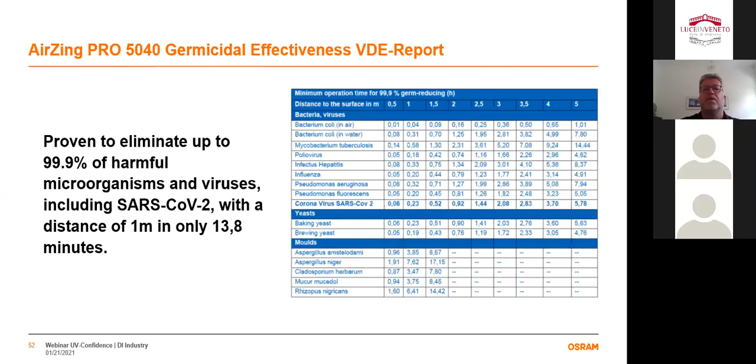I think this is in general all about UVC technology, different UVC regulations, and something about our products here.

What I did not include in the presentation here is the topic about concrete LEDs from OSRAM. I mentioned already there are existing solutions from our colleagues from OSRAM Semiconductor, and this is worth a separate presentation on their side. But nevertheless, if we go into the application here, I want to give you a rough information, so I have to shift the screen here. I don't know if you can see it.

OSRAM Semiconductor already launched, in January, two UVC OSLON LED modules here. The OSLON UV, one is a low power and one is a high power version.